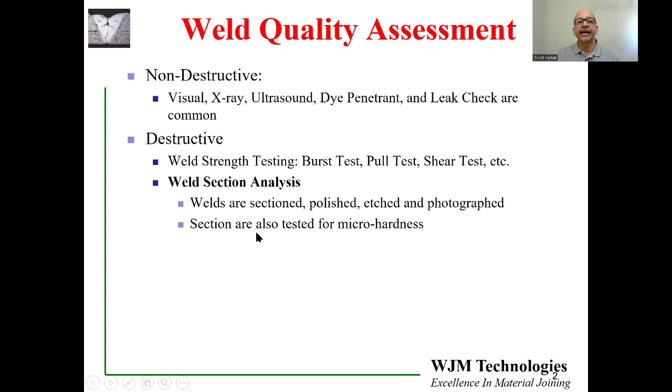There are some techniques where the sample eventually gets destroyed, and that is including weld strength testing, such as burst test, pull test, shear test, and can also include weld section analysis, where the sample is sectioned, polished, etched, and photographed, and in many cases also tested for micro-hardness.

The photograph on the left shows a welded sample, and you can see the weld. Obviously, it's a fillet weld, and we have marked the location where we want the weld to be sectioned. We transfer the sample to the metallurgy lab, where they will section the sample and then polish it and etch it to reveal the microstructural details as shown in the photograph below.

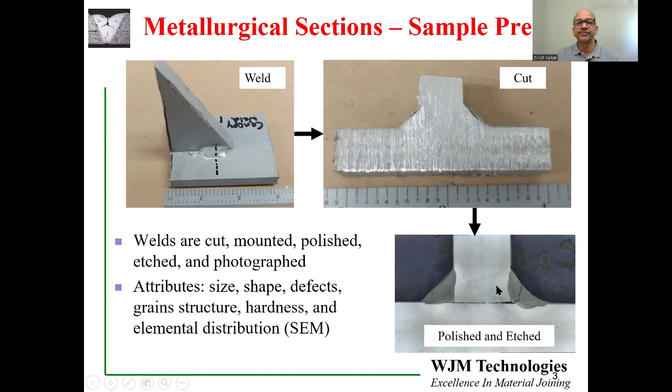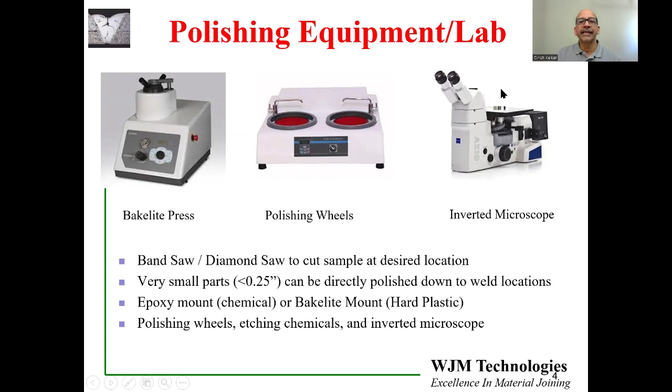The polishing equipment is fairly straightforward. You need some way of mounting the sample that can include a Bakelite press or epoxy mounts, which I can show you on the next slide. Then the samples are polished using sandpaper and in some cases, aluminum oxide and diamond paste. Once the sample is sufficiently polished, it is etched to reveal the microstructure and photographed using a microscope.

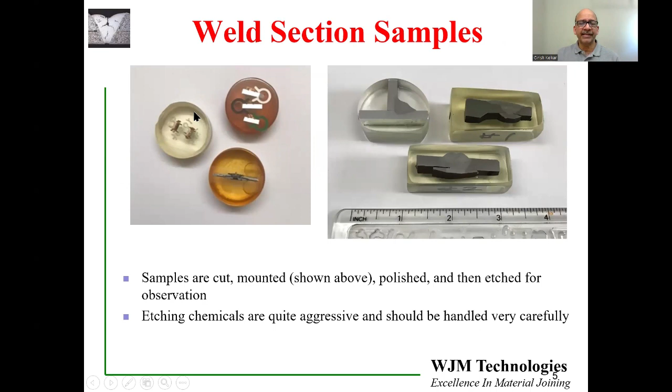Epoxy-mounted samples are shown in the photo on the left. When the samples are fairly small, the epoxy mounts are of the order of 1 inch in diameter. However, in structural welds, the weld itself can be quite big. In that case, the epoxy mounts also are quite big, as you can see from the scale below. In either case, the samples have to be polished, etched, and photographed.

Once the sample is etched and photographed, the lab will send you back images, and an image can look something as shown in the photo on the screen. This is a resistance spot weld, and the weld has been made between the two sheets over here, and the cross-section has been taken around the diameter of the spot. And you can see 3 different zones in the photograph. You see the fusion zone, the heat-affected zone, and the base metal.

Fusion zone is that volume of metal which would have reached melting point during the welding process, and then it froze. The heat-affected zone is a narrow band of material around the fusion zone, which got quite hot but did not melt. So it got hot enough to change its properties to a substantial extent, but not hot enough to melt. And that heat-affected zone can appear with a different texture in the cross-section.

And then, of course, we have the base metal. So after welding, you can actually have 3 different zones: the fusion zone, heat-affected zone, base metal, which can have completely distinct mechanical and chemical behavior or properties.

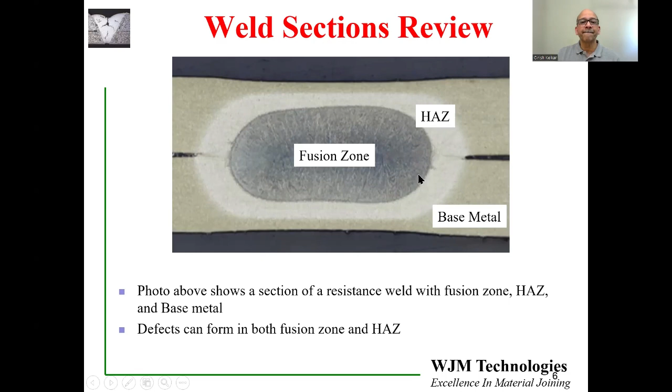Here's an example of a cross-section. Again, this is a resistance weld where the 2 parts have been joined, and the junction is as shown over here, where you can see a distinct line. In this case, the 2 base metals obviously look different, so they are different types of steels in this particular situation. And you do not see a fusion zone along that interface.

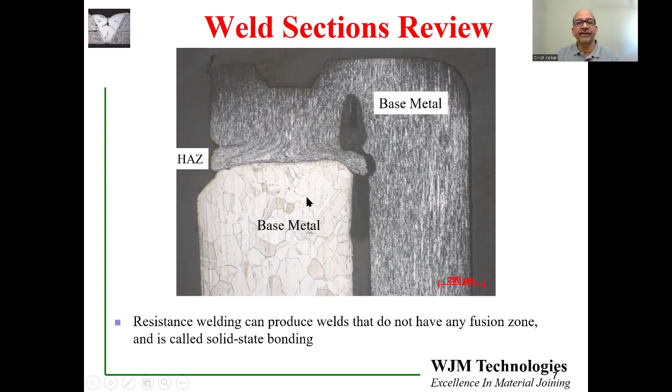Now, this is quite interesting and also quite common in resistance welding, where there is no fusion at the interface. There are many other processes, including friction welding, where there is no fusion. So in this case, we have the base metal and the heat-affected zone. And in the heat-affected zone over here, we can see the flow lines of the material having been flowed during the welding process. This is a projection weld, and we will review projection welding in another video in this playlist on resistance welding.

When we look at the weld, we also are interested in trying to understand the mechanical behavior of the weld. In many situations, the welds we make are very small, so it is very difficult to actually remove a certain volume of the metal for mechanical testing. So what we do is we use micro-hardness as a proxy for strength. So we ask the lab to run a micro-hardness scan.

What we are interested in is finding out if certain zones in the weld have become very soft or very hard compared to the base metal. And it can be both. The fusion zone can be harder or softer, or sometimes even the heat affected zone can become harder or softer compared to the base metal. How does it affect welding? Any zone which is much harder than the other is more susceptible to crack growth.

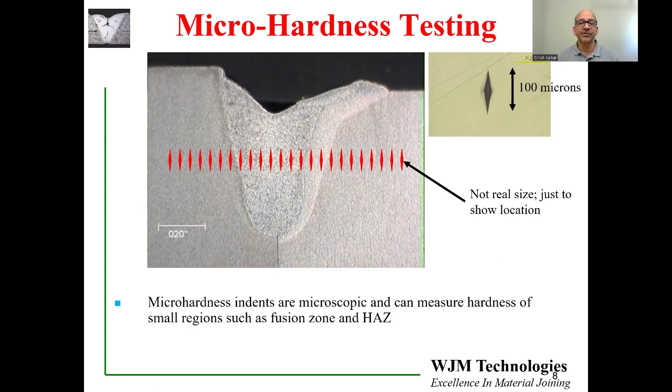So one of the most important aspects that we want to understand, in addition to the metallurgy, the size and shape of the grains and different zones and so on, is the mechanical behavior of the weld, and that we can get by micro-hardness testing. So a combination of metallurgical analysis and micro-hardness testing gives a fairly complete picture of the expected behavior of the weld. There are other techniques that can be used, such as SEM and EDAX, to identify different elemental distributions in the weld, but that is not often necessary. So I would say in the majority of the cases, a good cross-section and micro-hardness testing should be sufficient for you to take the first steps in understanding welding quality.

The weld section analysis is the soul of welding. It provides a wealth of information. First of all, it tells you the type of bond which is formed, which is not obvious from the strength. A weld can be very, very strong and not have fusion. So this comes as a surprise to a lot of people. The size of the fusion zone and the heat affected zone is obvious from the weld section analysis. So we need to know the size of the heat affected zone, which in many cases often decides the weld properties.

We can also see internal weld defects, again, which may not be obvious from the weld strength testing. So there might be some fine defects, such as fine cracks or porosities or undercut on the edge of the weld, which may not be very obvious in initial mechanical testing, but will affect the life of the weld. We can also see weld bead alignment, whether the nugget or the heat affected zone is symmetrical or is it biased on one side, and that can tell you issues related to process control. And then, of course, cracks and hardness, which affect the life of the weld.

So weld section analysis is a very important first step in understanding your welds, to understand the metallurgy, process, design, and defect-related issues. So if you are new to welding, or in case you haven't done cross-sections before, I would strongly recommend that you get some of the welds cross-sectioned to get a better understanding of what the quality issues are in your weld.